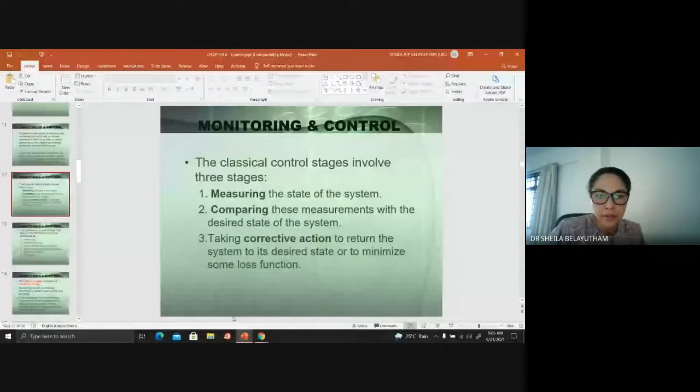So you would have second-hand information. Once you have measured the state of the system, or what has been done on site, you compare those measurements with the desired state of the system. Basically, you compare what actually has taken place with what you actually planned for, the baseline, which was developed in the previous stage, project planning and scheduling.

So you would compare and see if there are any differences, how much deviation would that be. How much differences in terms of the percentage of time, percentage of cost between actual and what has been planned.

And if there are deviations, this is where you take corrective action. You need to take control action to make sure that your system goes back to the plan you have actually developed, to return the system to its desired state or to minimize some loss function. This process is basically ongoing until you complete the project.

You do not measure just one month and that's it, you leave it. Your measurement goes on, it depends on how frequent you conduct the measurement. If you are conducting it daily, of course you'll be better able to understand where actually the problem roots from. But if you are measuring or looking at your performance on a weekly basis, you need to kind of check back. If there are delays in a week, I wouldn't say big, but the delay will be quite a lot.

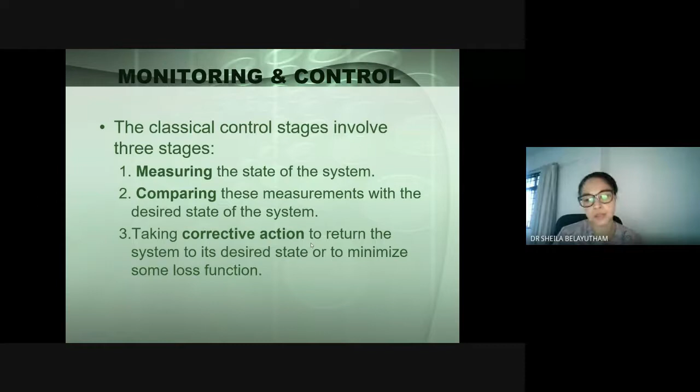So you might be doing it on a weekly basis or monthly basis. It depends on the site itself.

In a construction project context, the steps in the control cycle could be considered. This is typical. So you will have a plan - this is what you have done in the last chapter. You have a plan, you have a schedule.

Once you have that, you implement the plan. Usually we will follow according to the schedule that we have provided. Activity A starts when to when - that is where the subcontractor for activity A will come in, conduct the construction and complete supposedly within the given duration. So you implement the plan.

Once you are implementing the plan, you need to monitor how much of the output and record it. For example, activity A is for a month, and let's say you are monitoring it weekly. So at least you would have known in a week what should be completed. Then you periodically monitor it until it completes within a month. You report the actual and also plan parameters and their variation, and you take action.

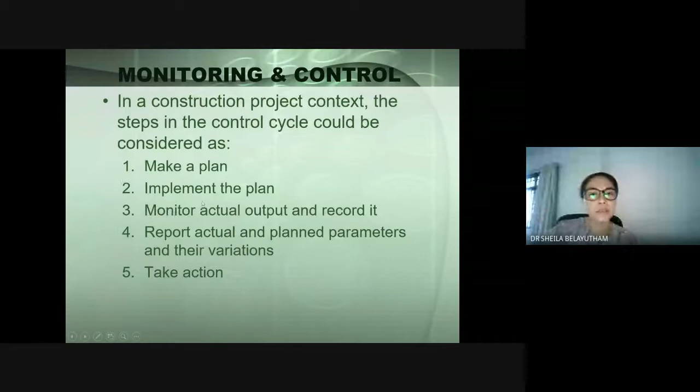So if you can see, basically monitoring and control doesn't run from here - you could actually see the redundancies from the slide. It is just to enforce that monitoring control. Basically, these are the cycle, it doesn't run from there.

Similar to this, the first four stages constitute monitoring, and the last stage constitutes control. Similar to what we have discussed.

Monitoring provides quantitative information because you would be resulting it in a percentage manner - how much percentage of deviation are we talking about. This quantitative information would result in a control action. Quantitative meaning to say that it could be basically in a numbered form.

If you are talking about qualitative, which means it's not in numbering form, it is in superficial observation, verbal, without any number given. So that is the difference between quantitative and also qualitative.

Qualitative can be said by someone. For example, the engineer said, okay, we are delayed where activity B has not started and so on - so you cannot quantify it, it is just a saying. But quantitative is where you observe and you basically note down how much we have actually delayed or have not started, and it is more reliable basically, because we can actually quantify it in terms of number.

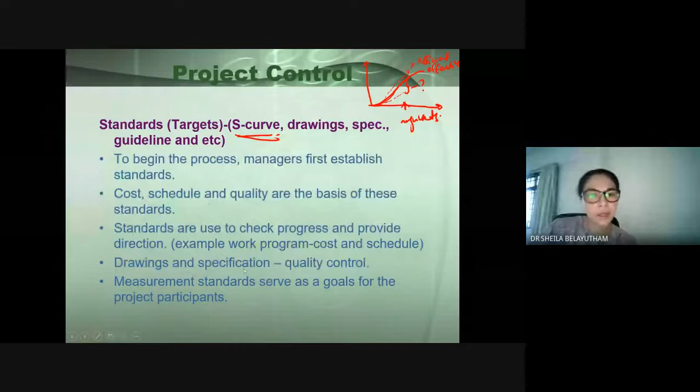Actual is basically what you observe from the site, what you actually experience. That's the second component of project control: one is the standard, one is the actual. This would show accurate costs, how much you have spent, accurate schedule, accurate quality. Actual performance compared to planned performance provides the progress. This is important: actual compared to plan gives you the progress.

This goes back to basic control theory. Typically it is similar. You have the work plan, you have created the plan, you initiate the plan. While you're initiating the plan, you might have all these external factors affecting your progress. You might be behind schedule because of material shortage. It can be consultant related, it can be cost related. For example, the client is not providing the payment monthly as is supposed.

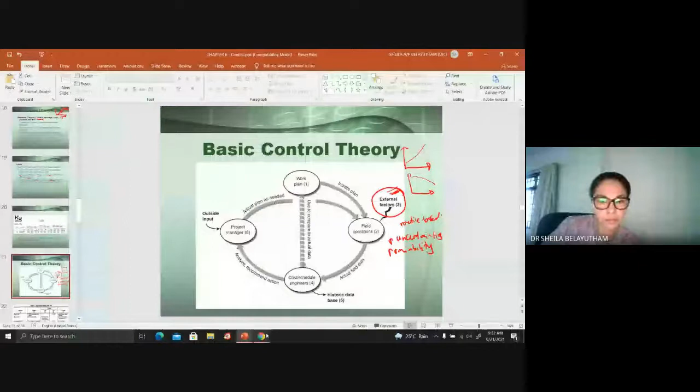Manufacturing is very routine based, and we are not. We are actually plagued with uncertainties, and that creates variability. So high uncertainties, high variability, due to all these factors. These factors would impact the field operation, the plan. Those factors basically give way to whatever you have planned, and that will give you the actual. That's why with all these factors, it is not easy for you to get the actual and the plan to be the same.

But if you can do that by overcoming all these external factors, then you are a very good project manager. As a project manager, your task is to fend off or solve the issues with all these things, and yet still provide actual field data which is similar to the planned field data. That showcases how good a project manager is. A lousy or slightly underperforming project manager might have a plan, but gives way to all these factors, causing the actual to be extremely negative in terms of time, cost, and so on.

Next you will have the cost and schedule engineers to see what could be the recommended action. So you will provide the analysis, recommend action to the project manager, and if the project manager has outside input as well, an informed decision should be taken. Then adjust the plan accordingly, comparing your plan to the actual data.

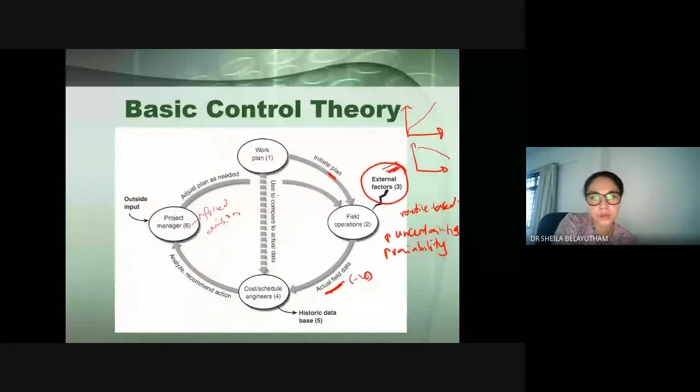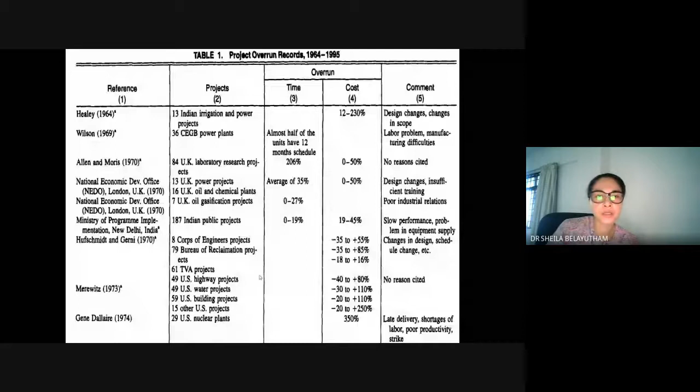These are typically some of the project overrun records. From here you can see that construction has been plagued with this problem since very long ago, and until 2021 we are still having such problems. We are still having design changes, insufficient training, but poor industrial relations are not that bad nowadays, because we have workers' unions. In those days there might have been restrictions, where workers might not be allowed to have unions, in order to control the workers so that they do not retaliate. But now we do have workers' unions.

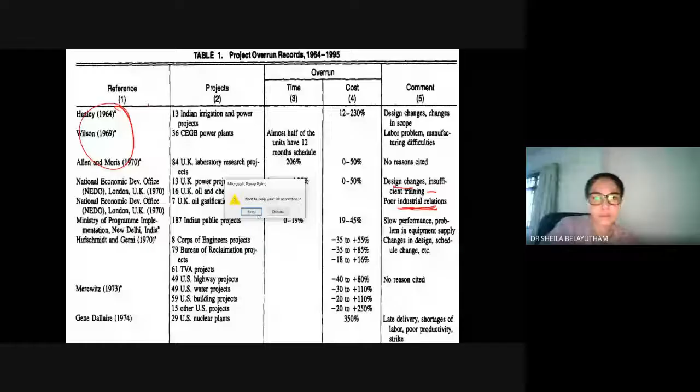But sometimes, because we are dealing with a lot of foreign workers, how well their welfare is taken care of might still be questionable. We do have acts in place, such as the Employment Act. Especially if they are with a permit, we have the proper act for them.

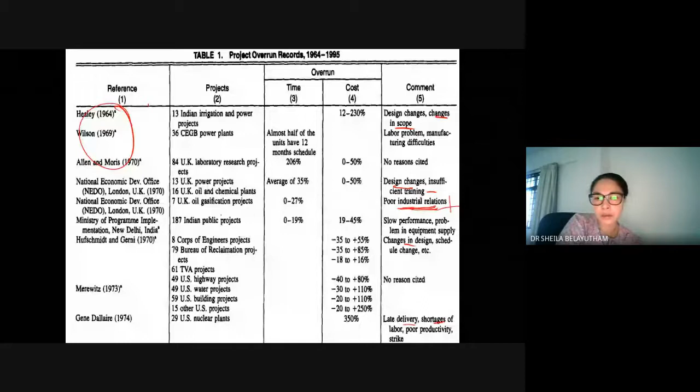So we have change in scope, change in design, late delivery of material, shortage of labor, and strikes as well. Manufacturing has a lot of strikes, but construction maybe not that much. So you still have a lot of various reasons, as early as this and in fact until now: communication issues, inadequate machinery. Typically these are the factors that would give way to your progress.

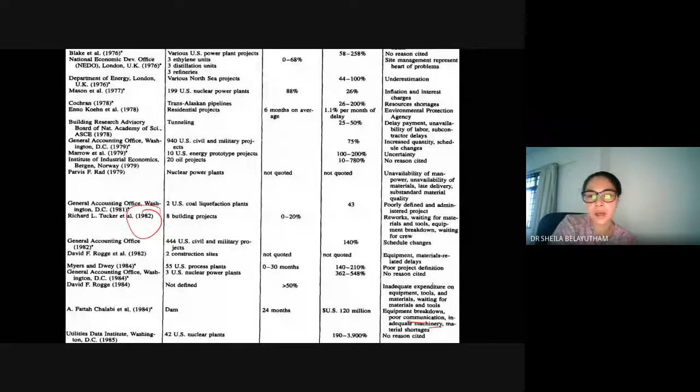All right, so preparing for a construction project, the project must be broken down. I think this one is pretty clear; we have gone through this quite a few times. It is broken down to a suitable level, basically through your WBS, work breakdown structure, to a level that you can monitor.

So that's why I mentioned that when you are breaking down your work breakdown structure, if you stop your structure at a very superficial level, it's very difficult for you to monitor. Especially if you stop at the level such as foundation and you just stop there. There are a lot of procedures within a foundation.

So if you're talking about pile foundation, you need to cut the pile to the level, you need to excavate, you need to hack the pile. So a lot of activities or processes you might miss out if you stop your work breakdown structure at a very superficial level. So that would not allow you to properly monitor your activities lah.

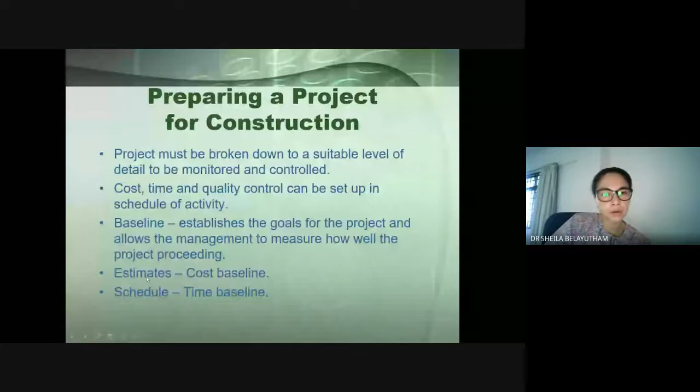All right, so cost, time, quality can be set up in schedule. So you have your baseline. Baseline is your standard. So you have your estimate and you have your schedule time baseline. Okay, the next part is basically cost control. Cuma cost control is not really in your syllabus, so hence we will just browse through fast.

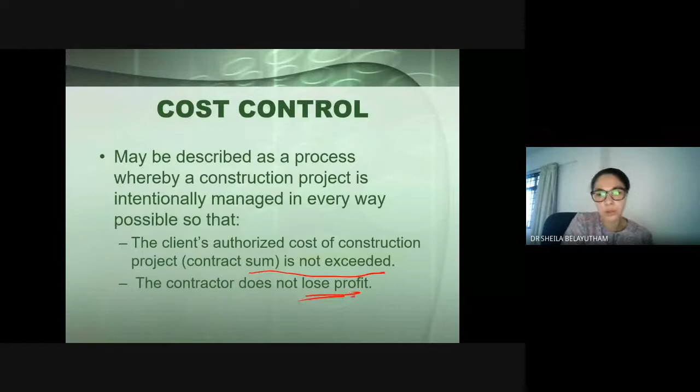So cost control is basically how you would actually manage your cost so that your contract sum is not exceeded. And very importantly, you don't want to lose your profit. So at the project production phase, it's the duty of the client's professional advisor to constrain the actual project cost to conform to the plan.

Partially, if it's for a contractor, it will be the job of the project manager, or if your project manager doesn't do much, probably the QS, quantity surveyor. But lots of time, basically the project manager should be able to manage it. So it's a duty of the contractor's QS or manager to oversee the contractor's sum. So same, whether you're talking about cost or time, you still have your plan, you still monitor, you still take action.

So this is typically the job of the client's QS, to manage the cost of the overall. The contractor QS is more commercially minded, to manage for the contractor. So you will have the QS for both sides. One will be the client, which manages the entire cost.

So you're talking about the allocation or the payment to the consultant, to the contractor, to the many parties that you engage. And the contractor is purely on how you manage the site, the production, and how efficient you can make it, and you would increase your profit.

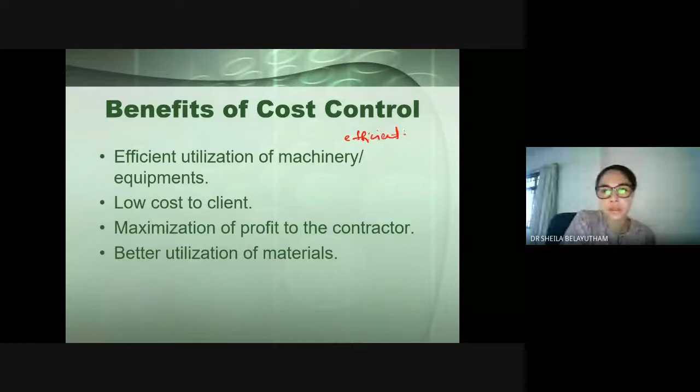So earned value management is a tool used to monitor and control. It will be a chapter after this. Okay, so benefits are similar. If you're controlling the cost, you're trying to use your resources efficiently. So efficient use of machinery, equipment, low cost to the client. Well, the contract has been signed.

Typically we are trying to plan, we are trying to execute it accordingly without exceeding whatever we have agreed upon. But for the contractor, if you can actually increase the profit based on the sum that has been provided, then obviously by all means. Cuma that's why, sometimes, whether your profit is properly attained. There shouldn't be any shortcut in terms of material use, standard of the material, standard specification. That should not be compromised lah.

So it is not about gaining profit and then giving quality that is not agreed upon. It shouldn't be cutting off material or cutting off the quality of the material whatsoever. It should be based on proper planning that can be efficiently done.

Okay, so there are two ways of getting a profit: a negative way or a positive way. The negative is the one we usually hear about, where lower quality material is used, material not to the specification. That is not how it should be done.

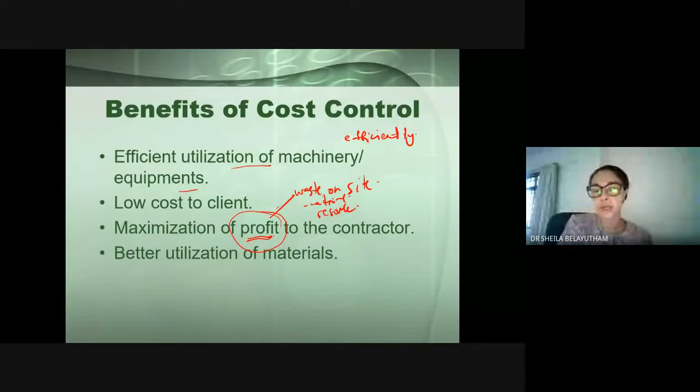Sometimes on site you have equipment hired on a daily basis, so you are paying for it every day, for example 500 ringgit, but the equipment is not moving. It's not working, which means you did not properly plan your resource utilization. If you plan it properly, one week to complete the activity and the equipment is used for one week properly, without any day sitting idle, then at least you are efficient in using it, rather than paying for a month assuming it will be used a few days here and there. Probably your planning is not efficient.

So there are better ways of actually gaining profit or reducing cost expenditure, but not through cutting material specs and so on. That is part of the ethics and your professionalism, which is very important.

Because you guys will be engineers outside, you have to hold on to ethics too. Sometimes when you go onto the site, you get influenced by what has been done, but if something is not right, you need to stand for it. Sometimes we get influenced and try to get ourselves engaged thinking this is how it goes, but actually for us this is not right, because people are paying for it.

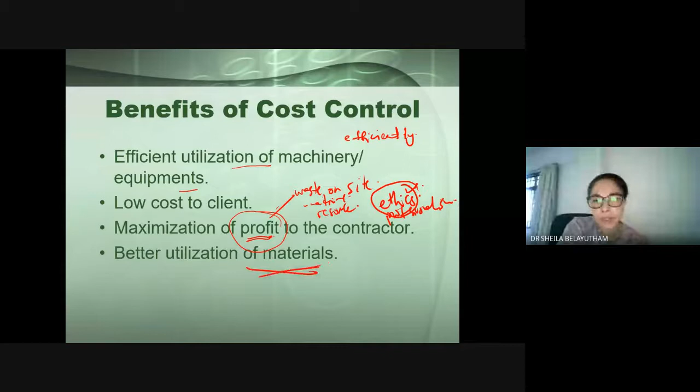And then better utilization of material, so there is not much waste on site. Okay, factors affecting cost control.

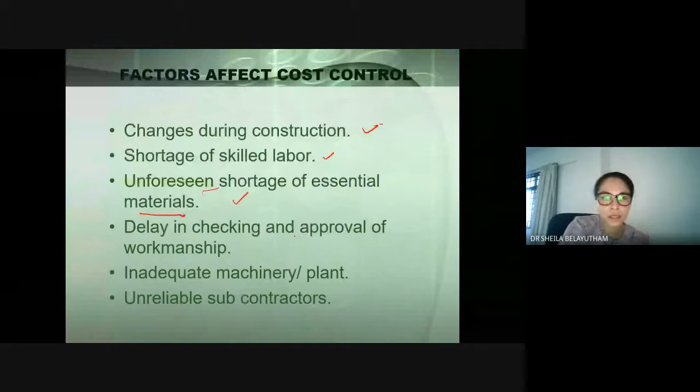Factors affecting cost control include changes during construction, shortage of skilled labor, and unforeseen shortage of material. Sometimes we have material which is not easily accessible, limited in terms of supply, and that will be a problem. Also delay in checking approval, workmanship, inadequate machinery, and unreliable subcontractors.

Other than that, you might come across a variation order. A variation order happens when a job on site is required to be done, but it is not stated in the contract. That is where you would have this VO, which is additional cost required to execute work not given in the contract.

Put it simply, the client would be very unhappy if there is a variation order, because that would mean additional costs for the client outside of the contract sum. For the contractor, on the other hand, it would be quite good news, because this is additional profit that might be included, apart from the contract sum.

Variation order happens when work is identified by the contractor that needs to be done but is not in the contract. When the contractor identifies that this work is absent from the contract, it needs to go back to the client. The client would get a consultant to review it: is it true that we have to do this job? If we are not doing this, then we cannot proceed further, which would give a very negative effect to the project. If the consultant says yes, this job is indeed additional and needs to go on, then it will be honored to the contractor.

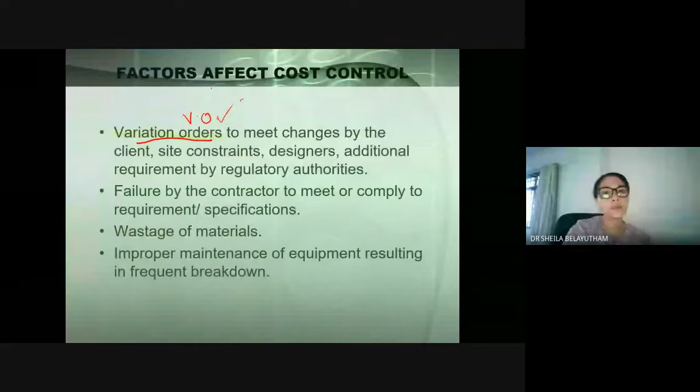Whether it will be the full extension or full amount that the contractor requires, or whether the consultant might say that you do not need to do the full scale, maybe half of the scale. Okay, so that is variation order.

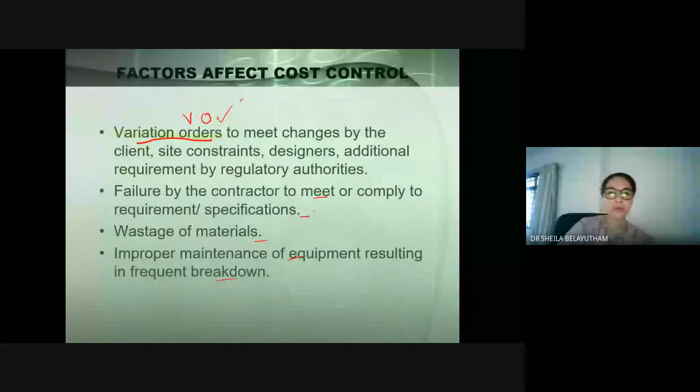Next, failure by the contractor to meet the specification could affect cost. Wastage would affect cost, improper maintenance also would affect cost. If there are frequent breakdowns, that affects the progress, which affects the time, which affects the cost, and so on. So you have workers but the equipment not working, so it's wasteful. Okay, so these are some of the...

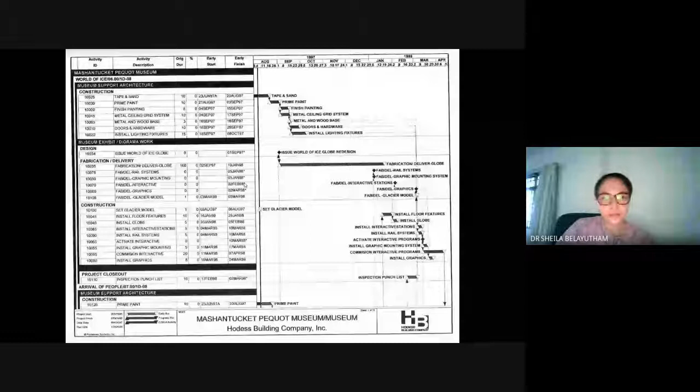Typical Gantt chart. This could be easily produced from a project, and this is basically what I actually intend to do today, but it seems there's not enough time.

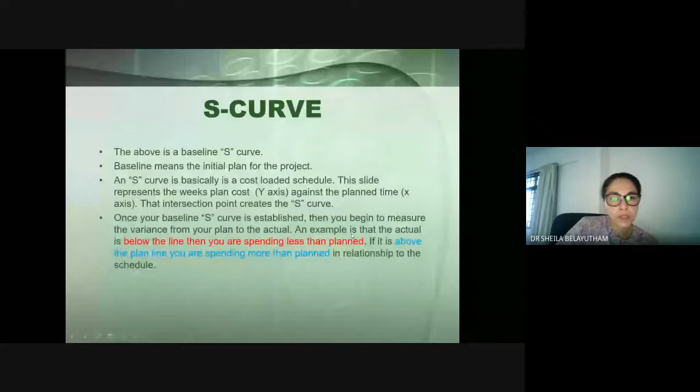So the actual is, if your actual is below the line, then you are spending less than plan, and if it's above, you're spending more than plan, and so on. So this is a way for us to actually come up with baseline planning.

So I think this will be fine. We have gone through it quite a lot. We have created a schedule, but we haven't created a baseline S-curve yet.

So I think we'll conduct this baseline S-curve tomorrow. We'll create the S-curve tomorrow, and we can end this topic with that S-curve tomorrow, and the next topic will be earned value.

What week is this? Yeah, this is week 11. So meaning to say that tomorrow we'll do S-curve, next Monday we will do earned value. I think we can cover earned value for maybe Monday, Tuesday, week 12. Week 13 we can do project closure, and project closure is just maybe an hour class, it's a simple topic. And week 13 also we can complete the project management topic, the job of a project manager.

And week 14 we can be a bit more leisurely. We can maybe just discuss in general to close up the topic.

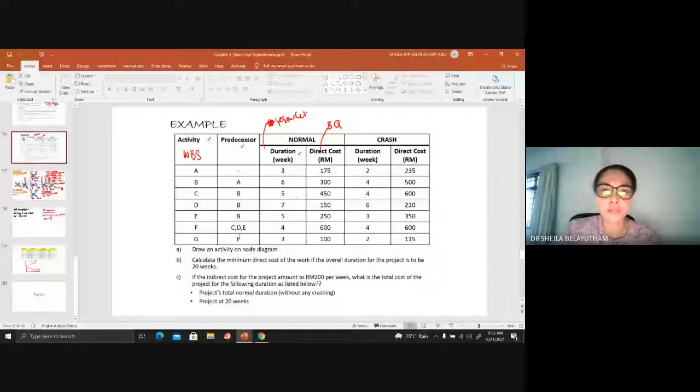So for tomorrow we will, hold on, for tomorrow we will be using this example. So actually we will be using this network, easier that way. So we will be using this activity, this predecessor, this normal duration and so on, and direct cost, we'll assume this as total cost. So we'll use this part of the example to create our S-curve.

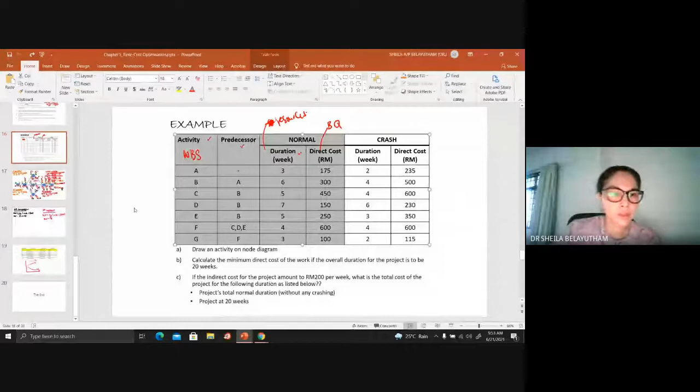So for tomorrow, make sure that you have this one, and then we'll try to create an S-curve from there. All right, any question for today's class?